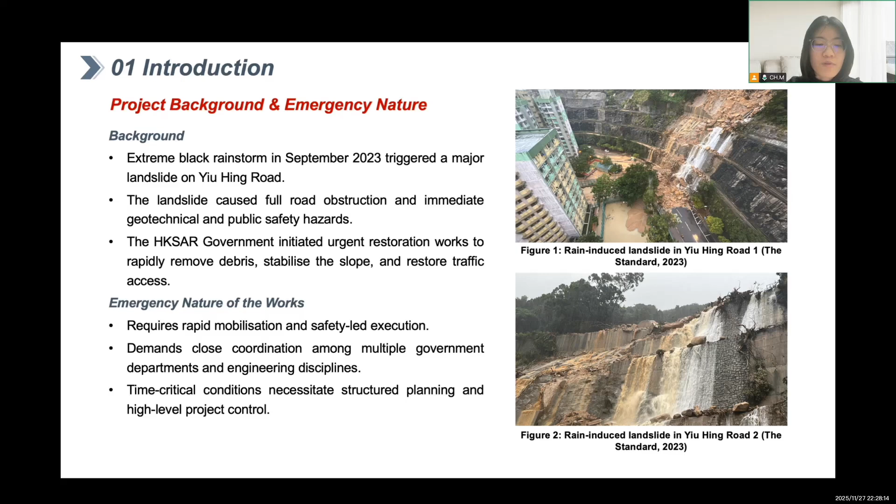Next, I will talk about the key task management framework and report structure. The restoration works involve several key tasks.

These include hazard isolation, rapid debris clearance, geotechnical investigation, temporary slope stabilization, partial traffic reopening, and finally long-term reinforcement leading to full restoration. These activities need to be organized into clearly defined phases and, wherever possible, carried out in parallel to shorten the overall restoration timeline.

This project planning is guided by the PMBOK guide, focusing on knowledge areas such as scope, schedule, risk, communication, procurement, and stakeholder management. The project is also implemented under the Hong Kong Government General Conditions of Contract, together with the relevant GEO and Highways Department technical guidelines, which provide the engineering and safety standards required for emergency slope works.

The remaining parts of the technical report are structured around this framework. We begin with the development of a work breakdown structure to define project phases and activities. This is followed by the AON precedence network diagram, which models the logical relationship between tasks. We then conduct critical path method analysis to determine the controlling sequence and the overall project duration. Finally, the report includes the planning outcomes, the schedule modeling results, and recommendations supporting the effective execution of the restoration project.

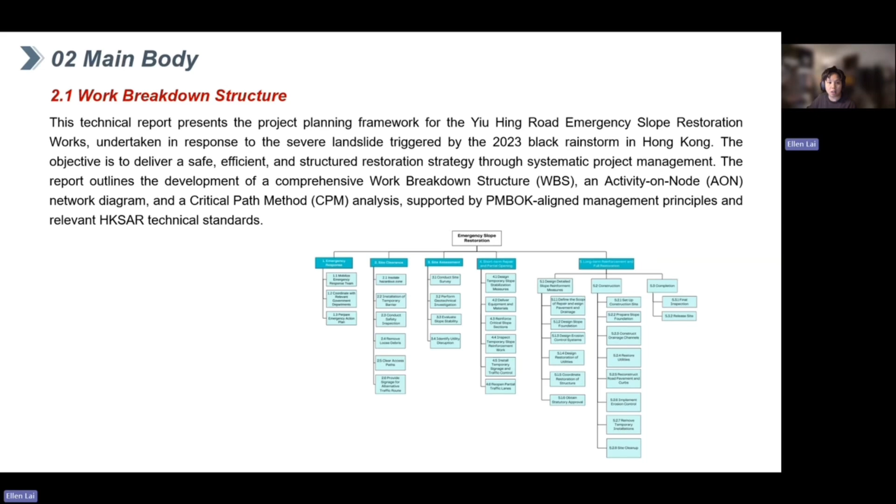For the work breakdown structure, we organized the emergency slope restoration project work so that it encompasses the necessary work scopes in order to deliver the project in a rapid manner while catering to safety needs. The WBS lays down the structure of the project, covering five areas: emergency response, site clearance, site assessment, short-term repair and partial opening, and finally long-term reinforcement and full restoration.

The first work package is emergency response. Immediate actions required to stabilize the slipped slope caused by the massive landslide are under this work package. It emphasizes coordination between emergency response teams, such as the police, fire services department, highways department, and civil engineering development departments. It is necessary to organize the emergency response teams of these departments in order to control the scene of the accident and prevent further collapse of the slope.

Secondly, the work package is site clearance. After the situation is stabilized, under safe conditions - for example, when the chance of further slope collapse is low, with site assessment by professional personnel - site clearance can be carried out.

Site clearance consists of works such as removal of debris, fallen trees, unstable materials, and damaged facilities like lampposts or drainage pipes, or any obstacles to safe access. For areas with potential further collapse, the area has to be isolated and kept clear from the site clearance team until it is assessed to be in a stable and safe condition. The clearance of the traffic road is also to be carried out under this work package.

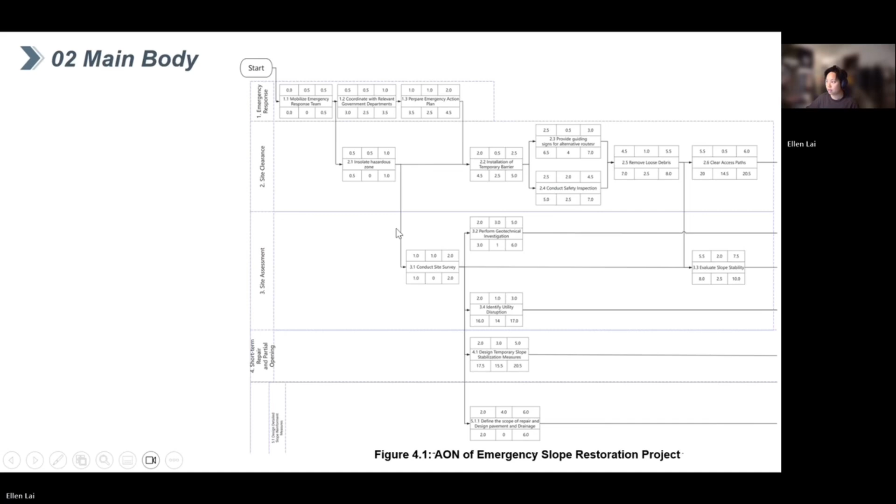After the site clearance, it is the site assessment stage. In this work package, it consists of site survey, geotechnical investigation, and evaluation of slope safety, targeting to obtain details of the geotechnical and structural data of the concerned slope area, in order to prepare for the upcoming short-term repair design and later on the long-term reinforcement.

So the next stage is the short-term repair and partial opening. Temporary stabilization measures will be conducted under this package. For example, shotcrete and soil nails will be put in place to provide short-term structural strengthening of the slope. This is to allow previously affected infrastructure such as roads and footpaths to be reopened and resume limited functionality.

And finally, the most complicated work package is the long-term restoration. This stage takes the most time because the detailed planning and full-scale restoration will be carried out. Design work includes permanent slope stabilization. Statutory approval will also be required in this work package. Design works including deep foundation, engineered drainage system, and slope retaining works guarantee long-term safety. After long-term restoration work, the infrastructure will be reinstated permanently. Finally, there will be compliance checks and inspections with relevant authorities to ensure the work meets regulatory requirements before completion of works and full release.

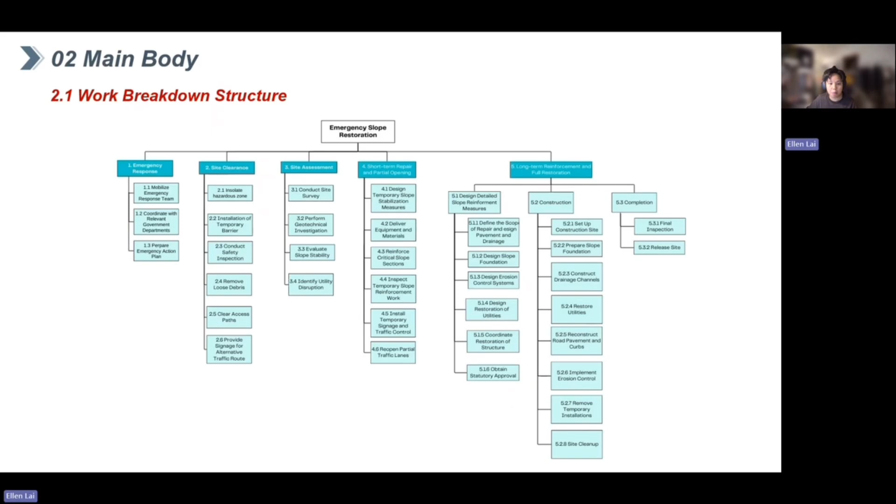Hello, Professor. My name is You Leyang, and I will introduce the project network diagram.

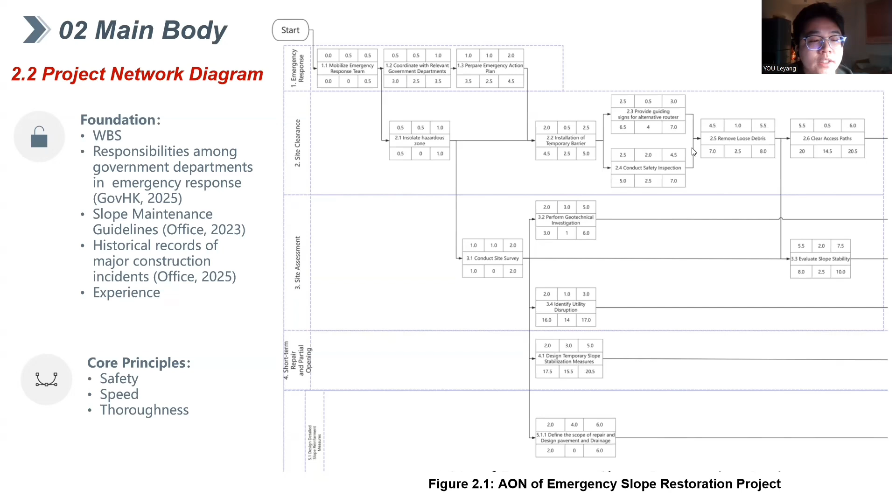The project network diagram illustrates the logical sequence and interdependence of all tasks in the landslide emergency response project. Based on the WBS breakdown and Hong Kong's established emergency response procedure, the network adopts a safety-first structure in which early-stage actions must occur rapidly and sequentially to stabilize the site. The AON diagram shows that emergency mobilization, site isolation, and initial inspection form the essential starting chain, enabling debris removal, access clearance, and subsequent geotechnical assessments.

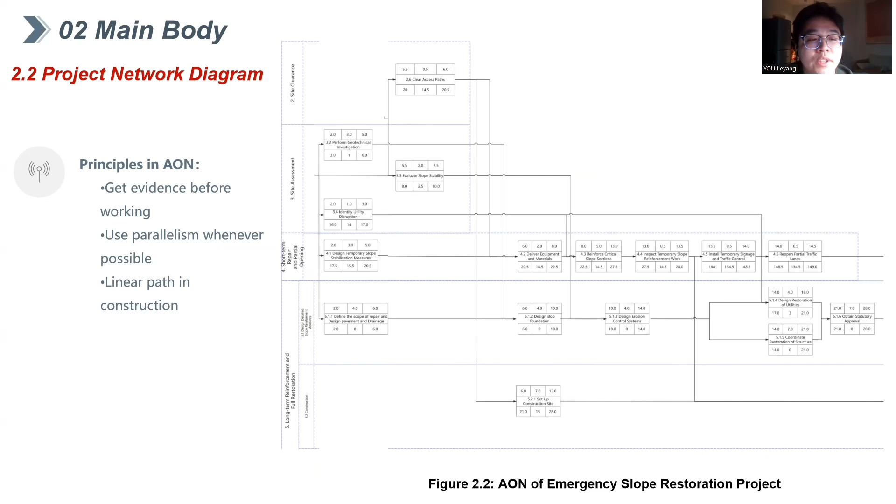As the diagram progresses, the actions feed directly into two parallel tracks: temporary slope stabilization works and initiation of permanent design tasks. Due to their strong dependence, the permanent works covering drainage, slope foundation, erosion control, utilities restoration, and statutory approvals follow a linear path step by step.

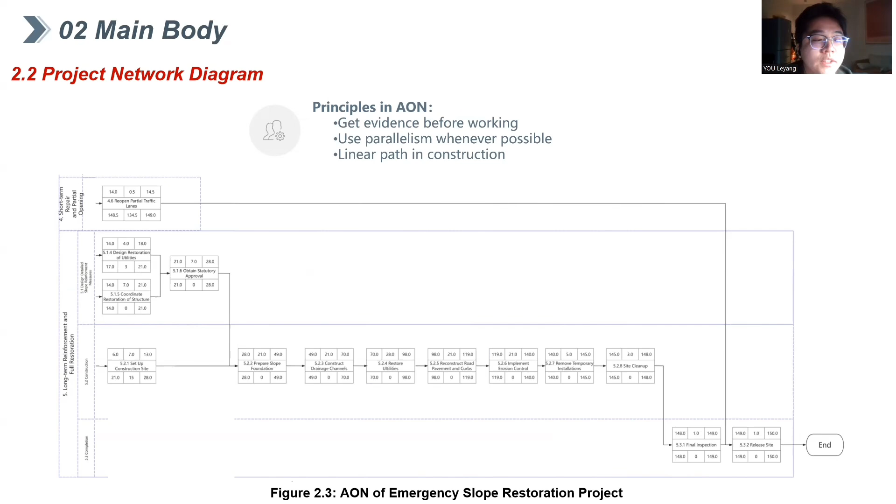The sequence then transitions into the construction stage, where tasks such as slope foundation preparation, drainage channel construction, utilities restoration, pavement reconstruction, and erosion control must be executed in strict order. The resulting critical path extracted from this network highlights the essential chain from emergency mobilization through permanent work completion. Any delay among these paths would directly extend the project's total duration.

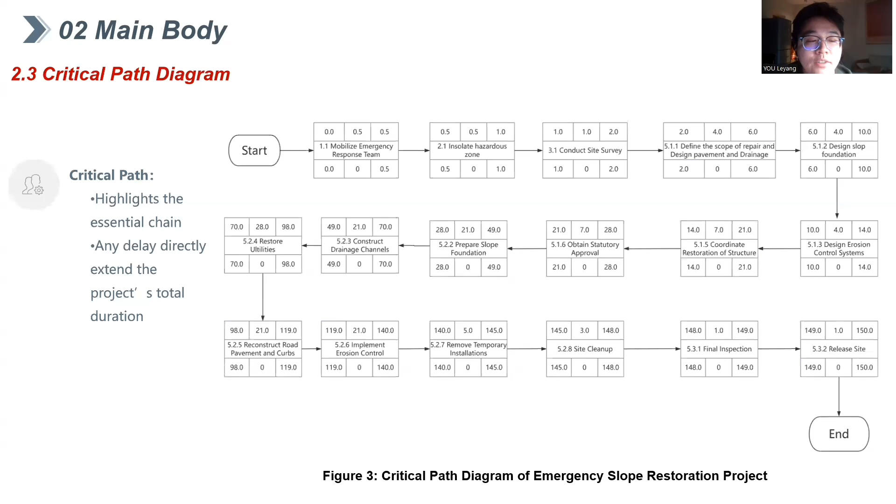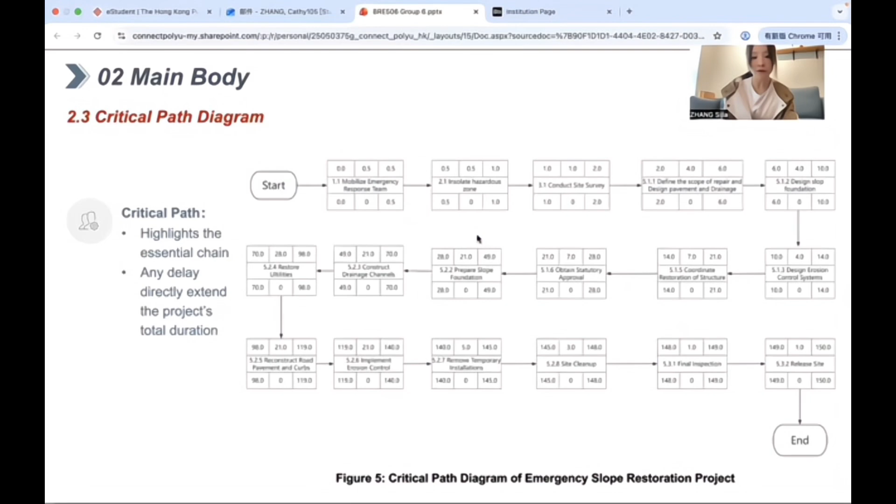My name is Zhang Sijia, and I'm responsible for the narration of the PDM diagram and the critical path diagram. As shown here, this path, which is the longest path of the project with a duration of 150 days, is identified as the critical path. The features of critical paths are that both free float and total float of each activity on the critical path are zero, which means any delay of activities on the critical path will lead to delay of the whole project.

As for principles of time estimate and precedence of activities, we refer to the Project Management Body of Knowledge guide. There are three main aspects to be considered. Firstly, risks such as weather and recurrence of landslides. Secondly, coordination with government and different departments, such as getting a warrant or permission from the government for the foundation works. Thirdly, precedence relationships ensuring logic, safety, and efficiency.

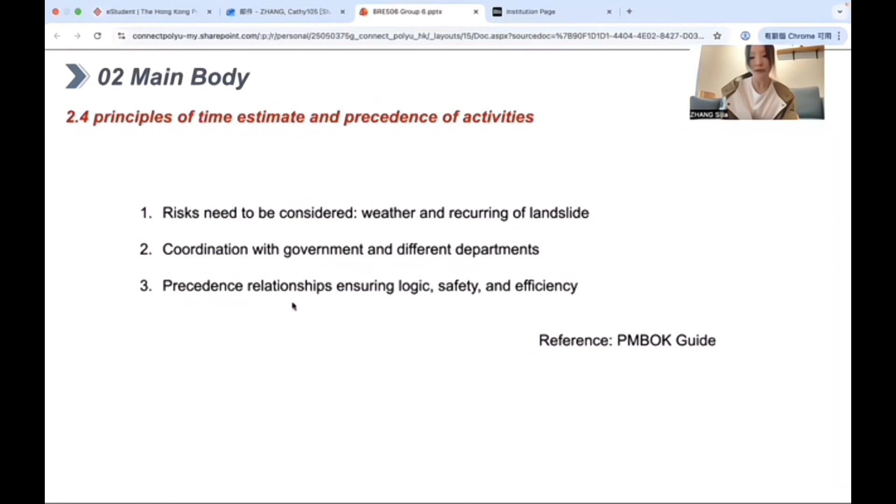For recommendations, communication and coordination are very important in the project. Conducting regular meetings is the most direct method to keep stakeholders familiar with the project status and updates. Different parties can coordinate at meetings and allow parallel working to speed up the construction process, utilize resources, and allow contractors to have better planning for execution of works.

On-site progress monitoring is also very essential. No delay is allowed on the critical path. Adequate monitoring works shall be arranged to maintain better progress control. We should also allow parallel execution of works when feasible and safe. It is suggested to utilize real-time monitoring devices in this project. Instant data and information transfer can enable a faster response to on-site works, so modification or rectification works can be done earlier before issues become apparent.

During the construction process, traffic arrangements shall also be properly managed. Regarding the location of the site, there are only two driveways available for traffic users. During construction, temporary traffic arrangements must minimize inconvenience to the public. It is important to assess the traffic use of the driveway and minimize implications to the public while proceeding with construction works smoothly.

To conclude, the proposed planning work is feasible and workable in delivering the emergency works. The critical path duration is 150 days, which aligns with the HKSAR government's request to reopen the road as soon as possible. The program reflects the actual situation and can be executed efficiently and safely without delay. The project details also comply with regulations established by different authorities. The proposed planning approach provides a reliable and practicable basis for implementing the emergency restoration works.